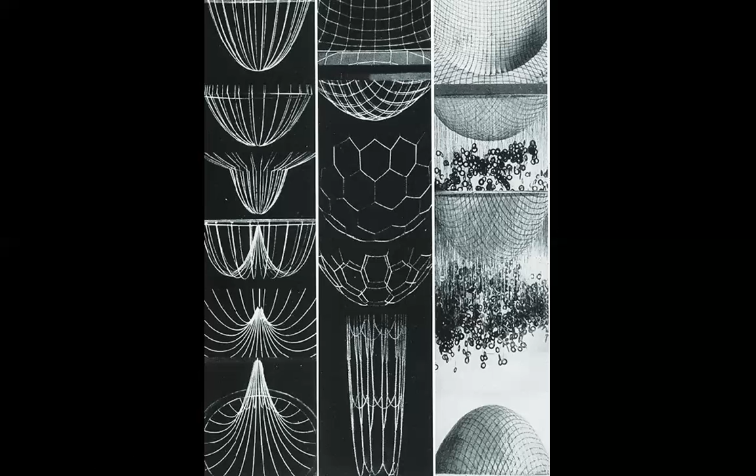Whether it is circular or rectangular, this is not really the point. In essence, from what I know about his work, he tried to infuse movement, a dynamic quality, and even an unpredictability into a structure that was still based on calculations and numbers and so on. In essence, kind of like Iannis Xenakis did in a different way, trying to bring disorder or freedom into an ordered system.

And we kind of see here the same thing - the musicality of a web, almost mimicking a spider's web. He was obsessed by lightness, and he did miraculous things.

I mean physically, it's easy for me to talk. Here, he didn't talk, he made them, he built them. And I like this very much, the ability to bring into physicality the ephemeral, the free, the disordered, the unpredictable, and even sometimes the metaphysical.

Procedural Frei Otto. He had a system which was not linear, which was not rigid, and that system allowed him these sort of things, which can be found in nature, but much more rarely in the work of man. And he was a force in this respect.

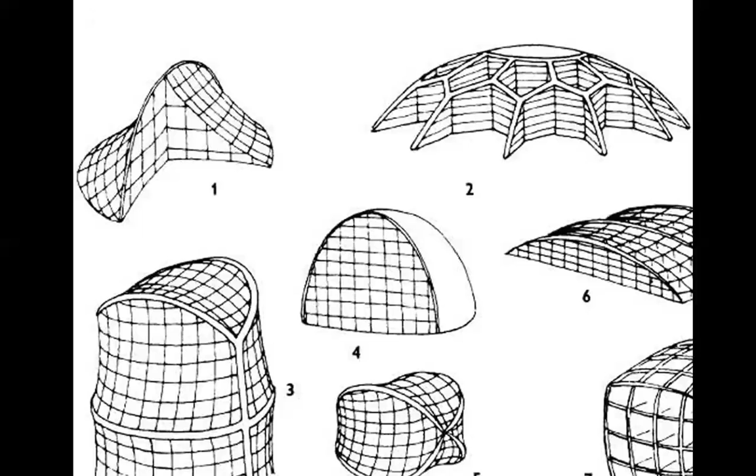16 hours a day, like in Vienna. That's how you learn a language, if it is German or Arabic. That's how you learn the digital language, by studying it very carefully and very intensely and with a lot of perseverance. But unfortunately this is not practiced. In our schools, we postpone and postpone and postpone, and we find glory in using SketchUp in the 6th year. It's not enough. Anyway, I guess we are not too ambitious, and that's a problem.

I said it before and I will say it again. I have the CV of a young Japanese architect from some years ago, maybe 5-7 years ago. And if you look at his CV and at skills, there are around 20-25 softwares that astonished me when I saw them, because at least half of them I never heard of.

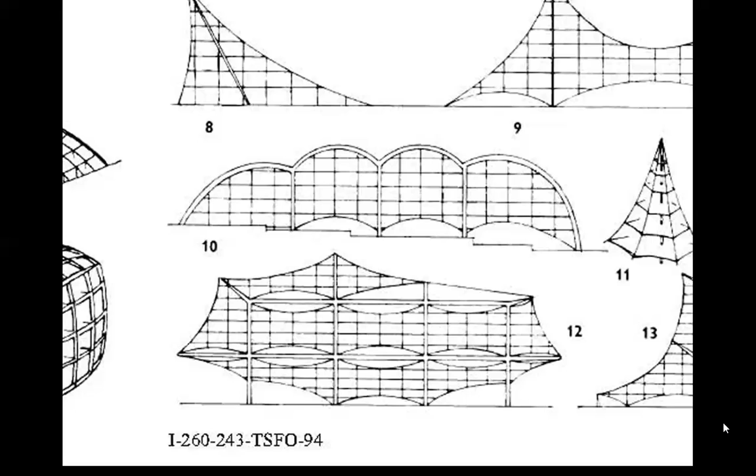It's true, I'm not one of the most knowledgeable about these technologies, but I admire very much the people who push the frontiers, who study the newest softwares, digital technologies, digital procedures. You have to, because it belongs to your time. And it's known, if you are to study a language, any language, the sooner you learn it and the more you practice it, the better. That's how you learn a language.

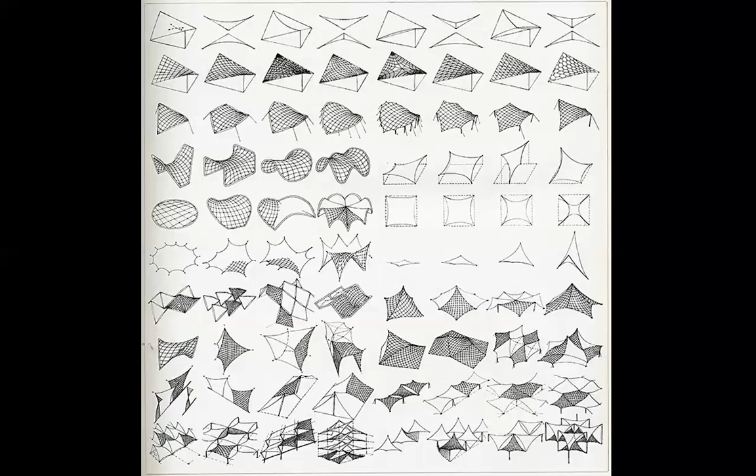Any parent knows it. If a parent wants a child to know, let's say German, well that child will be asked to study German when he or she is 3 or 4 years old or something like this. That's how you learn a language. And with the digital language it's the same thing. The sooner you learn it the better, and the more you practice it the better.

What do we see here? We see again drawings that seem to be, well, they are not undecided. They are schematic configurations, structural configurations that are based on order, but you look here, there are deformations, there are deviations from strict Cartesian rules, and the roundness of the thinking behind them shows the complexity of the procedures that Frei Otto tried to arrive at.

This is problematic. That's why many of our cities are so banal, because as opposed to medieval cities, they simply don't assume the roundness, the spiral, anything organic. They are strict, with parallel lines and 90 degree angles. Here we don't see too many 90 degree angles, do we?

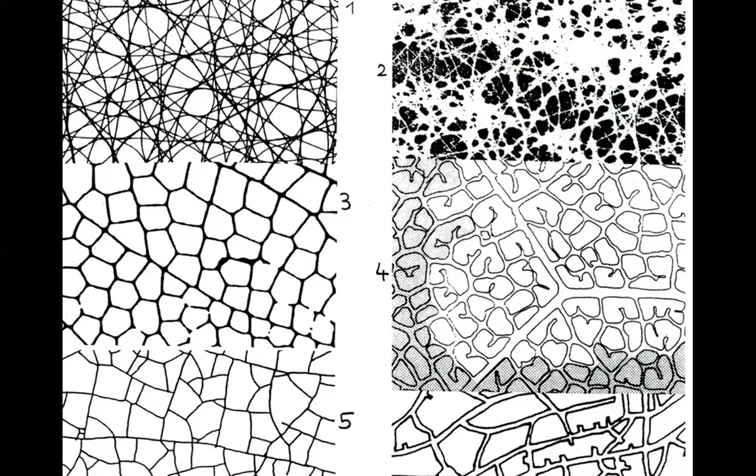Unfortunately, very rarely do I see bioarchitecture in the works of certain schools of architecture. Let me put it in a more diplomatic way.

Interestingly, the naive world of the Middle Ages were closer to some of the newest research, based on very sophisticated technology, which explores spontaneous order. In science, these two words mean something specific. How do you create spontaneous order? As opposed to the rigid Cartesian order, you bring in a so-called spontaneous order.

Look here, no polygon repeats itself twice. They are all a little bit different. They all belong to the same family, but they are also a little bit different, and they accommodate each other.

Is this an organic quality? Obviously this man, this architect, this engineer, was questing for what is life and alive. He was not happy with the dogmatic, rigid crystallization of...

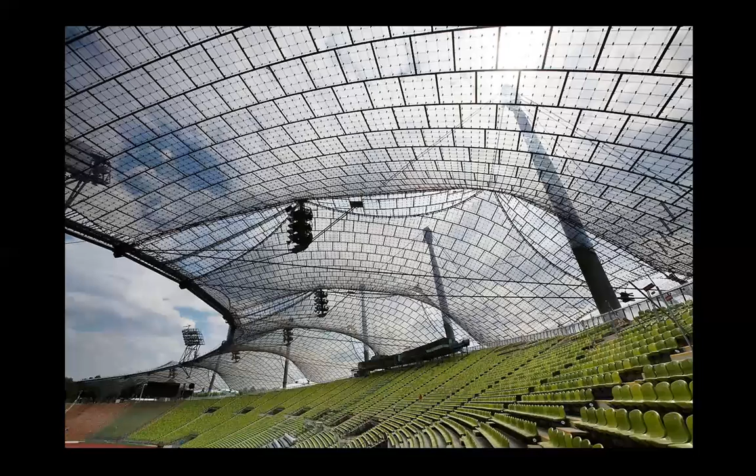Again, it's about building for human life, for the humans, but in a way which would not insult nature. And this is not easy to do. He did it—Frei Otto did it.

A stadium could very well be a prosaic structure, yes, of considerable dimensions, and to bring in the word delicate when you operate within the field of a large stadium—this is not common.

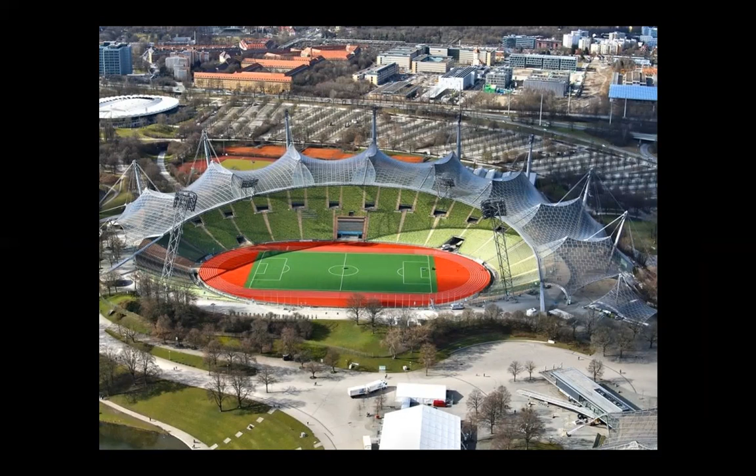But he did it. He built it in such a way that it is functional, but lightweight. It's almost discreet. It's interesting visually, and it works. This is based on his research, his continuous work, pushing the frontiers of both structural engineering and architecture.

Because the truth is, what is an architect? Well, Frank Lloyd Wright put it right: an architect that is a great architect is a great poet. He doesn't necessarily write poetry with words, but he writes poetry with materials—wood, glass, stone, metal, whatever—but expresses a poetical feeling and a poetical thought.

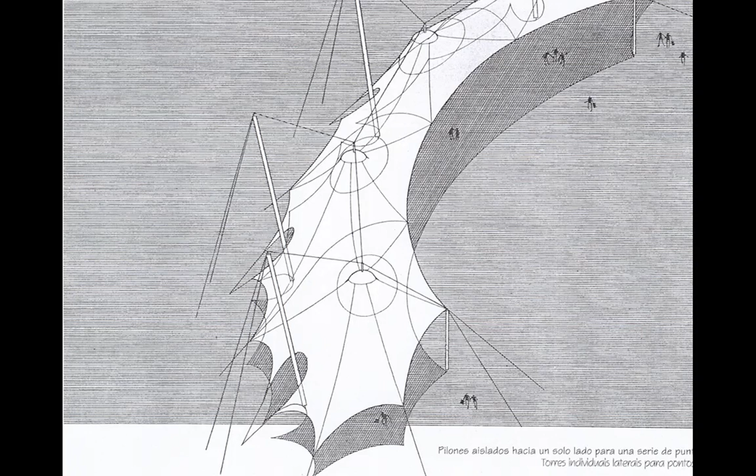I improvise some opinions when I look at these images, just like you do. Someone more rigorous than me and trained in engineering would probably say more valuable things.

I regret Bruce Denzinger is not here. He most surely would have said some important things. I should have invited him, but I didn't think of it until now.

But even if we look at these graphic representations of what we did, what do we see? Well, we see what we see when we contemplate the web of a spider, or anything that animals, insects, or bees do. There is a mysterious order in nature, which science now calls spontaneous order.

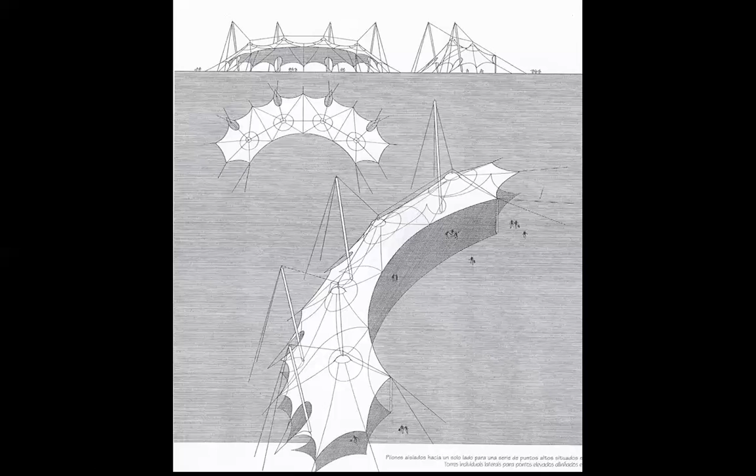And I think Frei Otto was also searching for something similar. If I am to use the words of Pascal, I would say there is l'esprit de géométrie and l'esprit de finesse. Because there is geometry here, but it's not a rigid geometry. There is the spirit of geometry, but there is also the spirit of fineness, which brings in small accidents, or small deformations, small deviations from the strict, repetitive, dogmatic rules.

In essence, it's about asserting freedom without falling into chaos. It's some kind of balance between order and disorder.

And by way of this, I have to tell you, I met a mathematician in the United States. Abraham was his name, Ralph Abraham I think, a mathematician from California, but I met him on the eastern coast of the United States, in Eastern New York, and he invented a word. This word was dyschaos. Now everybody knows there is order and there is disorder, and then we know there is the word chaos. But apparently until him, no one thought of the word dyschaos.

Now what is dyschaos? It's order, but a different kind of order than the first one means. We have order and we have disorder — it's opposite. Then we have chaos, but you'd say the opposite of chaos is order. Now, he says that the opposite of chaos is not order, it's dyschaos.

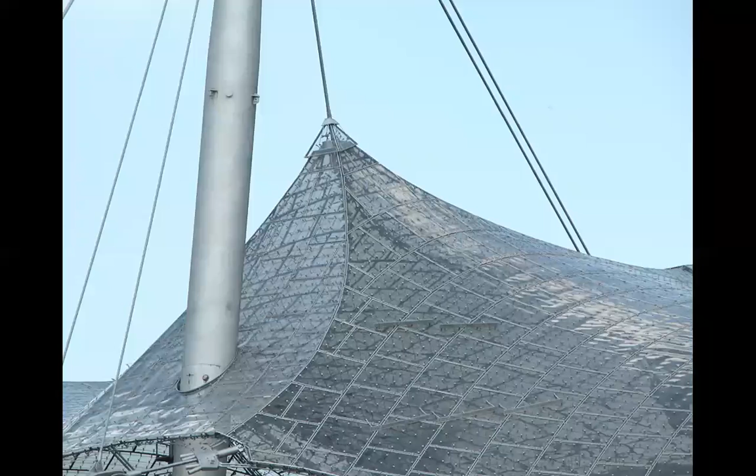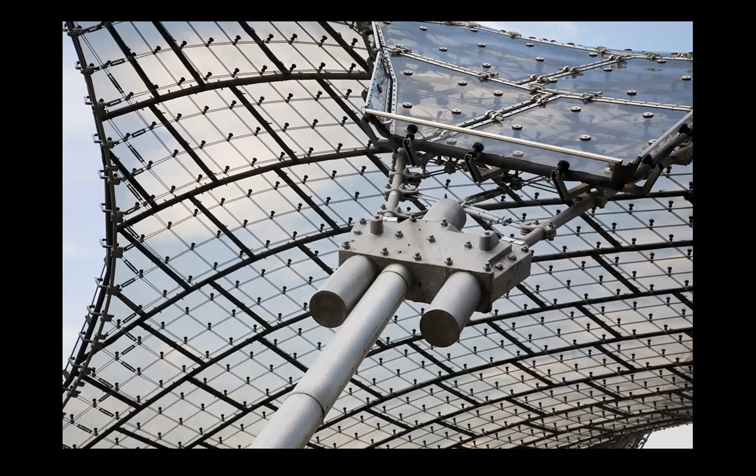It was great. I mean, I throw words here in a more inspired or less inspired way, but this man built with measurable entities, with materials — built and created something that was made by man, was calculated, was measured, but also had the fragility and the gentleness, the delicate aspect of grace. Even these are graceful structures.

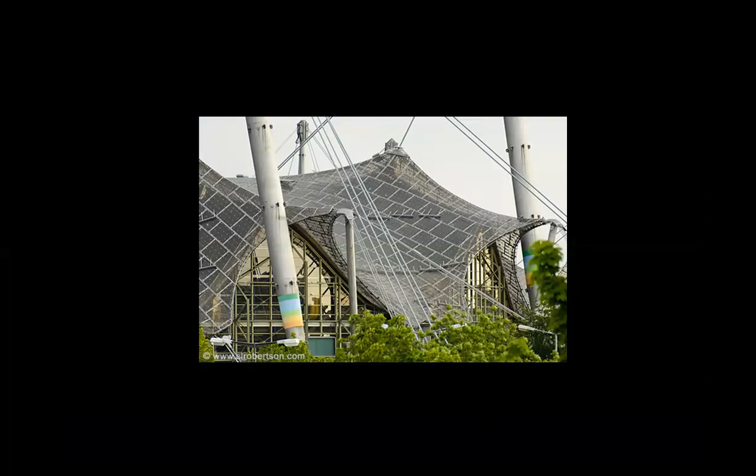That's why I recall these words by Pascal quite often: l'esprit de géométrie and l'esprit de finesse. If you can combine geometry with fineness or with grace, it's like combining will or willfulness with gracefulness. It's not easy.

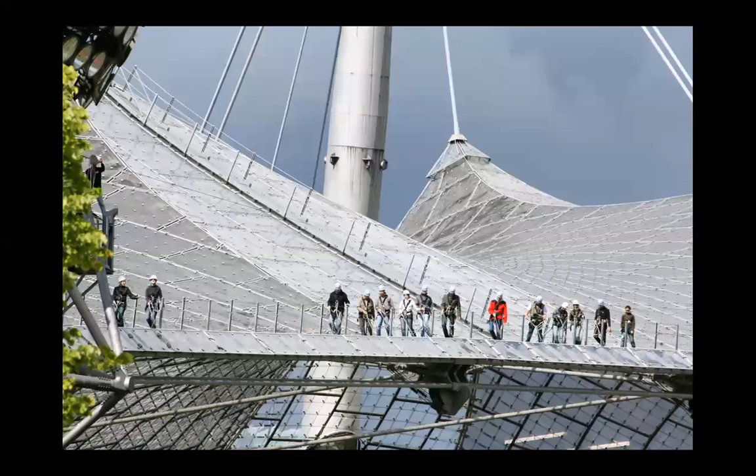Now look how strong these things are, because they seem to be thin and light, and so on, fragile in other words. But these men — probably a very vigorous man — they're all on top of this structure, and probably many others would have been supported by this.

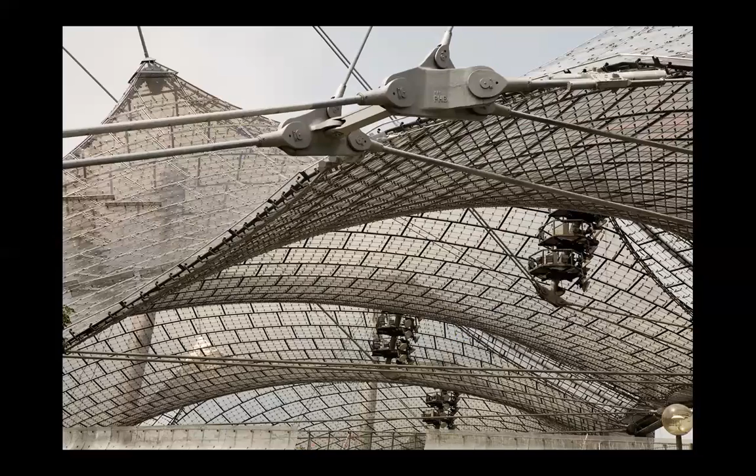To put it simply, any great creator in any field searches for freedom. Maybe I put it simplistically, but that's kind of the truth.

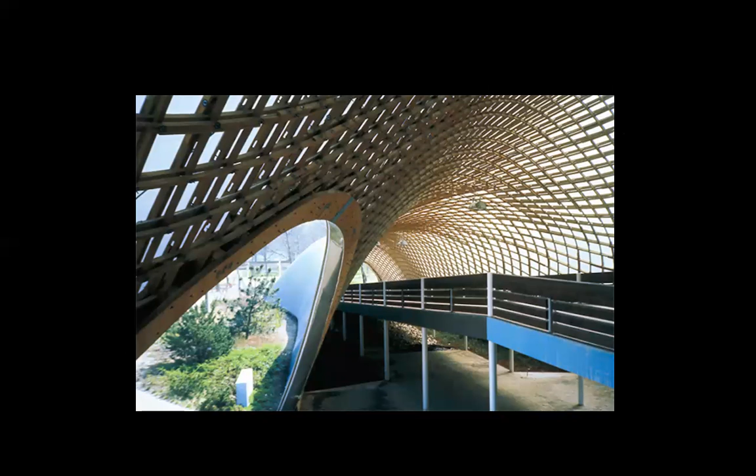This timber lattice self-supporting roof structure allows diffused light into the building and creates a sense of weightlessness inside. Well, what is this sense or feeling of weightlessness? It's actually about freedom, or the illusion even of freedom. But it's important, that illusion.

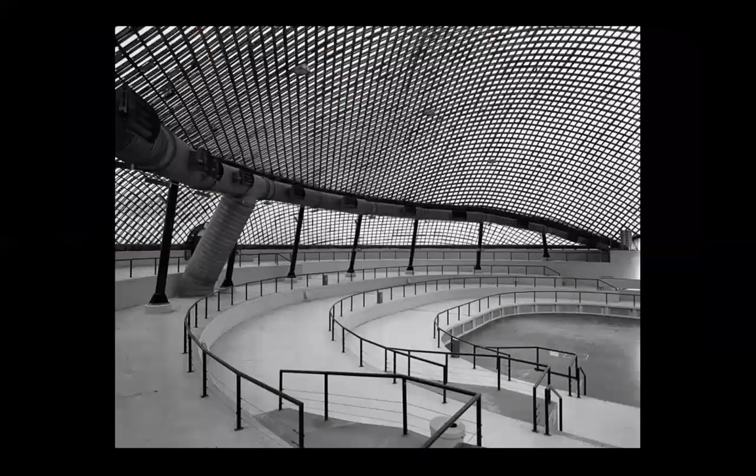And just like in the case of the music by Yannis Xenakis, who worked with numbers and sounds, here he works with numbers, trying to achieve a structure which is not rigid, although it's based on some kind of system — an organic system. That's why I would say his structures are biostructures, his architecture is a bioarchitecture. And look at it — it's coherent, it is a coherent system, but it's not rigid.

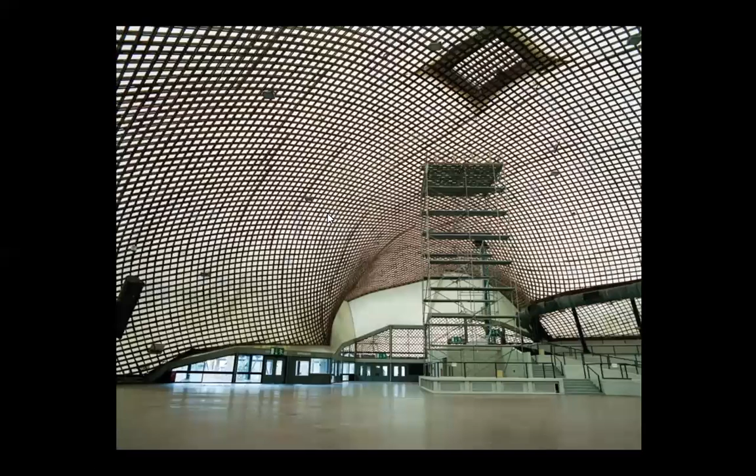He arrived at some kind of mystery of generating a structure as if God made it, when in fact it was man-made. This is what you get when you break the box of simplistic Cartesian thinking, and you see the coordinates allowing for fluidity. That fluidity, look at it, it's beautiful.

Just like in the polytopes of Yannis Xenakis, and in music the same. Music is based on numbers, the notations, the musical score, but you search to evoke through sounds life itself. Here the same thing, the organic world enters the world of man. And look at the span, it's huge, and it's so gracefully done. It's gracefully done because the man was great as an architect and as an engineer. That's why.

What amazes me is that this, what seems to be very freely done, is actually based on calculation, very rigorous calculation. Which means calculation, if it's not an end in itself, could be a means towards achieving freedom.

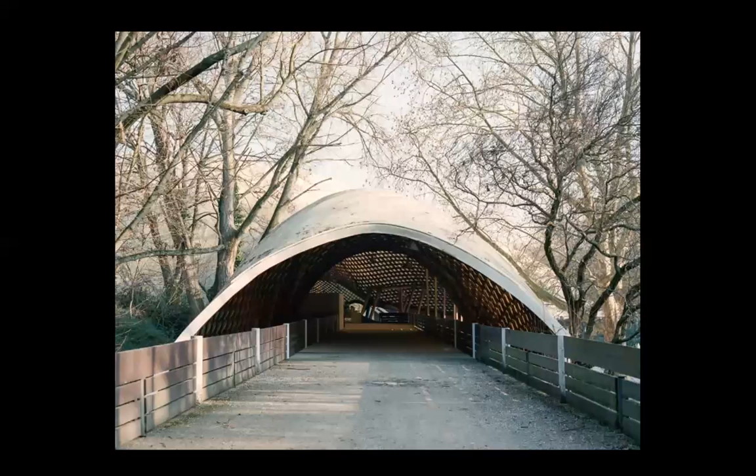I'm sure he was inspired by nature. After all, we saw the title that I read earlier, network, cities, and trees. Trees, yes, the beautiful trees, the beautiful trees we cut down. Look at this, this is almost like a divine Frei Otto work, and like a divine Alexander Calder sculpture. It's beautiful, it's all there. All the mysteries of the world are in the tree and in the flowers and in the grass and in everything that nature made. It's very beautiful, to be honest, more beautiful than even the building by Frei Otto. But it's hard to compete with the author of these magnificent trees. We attempt. It's important, the attempt.

To build in such a way that we do not insult nature. Ideally, we should build so that the trees nearby would smile and murmur, thank you Frei Otto, thank you Francesca Coman, thank you Alexandru. Yeah, we need to work. We need to work, but we also need to love. You can't work without love.

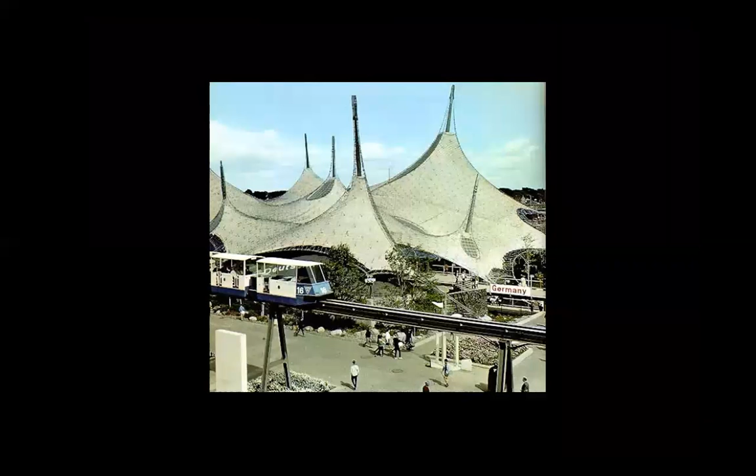So this is in Montreal. I should have had also pictures of Buckminster Fuller's biosphere and the Habitat by Moshe Safdie. Look at this.

This is beautiful. It's like an artwork. It's like an incredibly lyrical graphic work, and it's not — it's a structure, but it's so indeed delicate and nuanced and gentle, and yet strong enough to support this covering above a large space. This is poetry. That's what it is. It's when engineering becomes poetry.

Japan Paper Pavilion, Expo 2000 in Hanover, Germany. Frei Otto designed the Japan Pavilion for Expo 2000 in collaboration with Shigeru Ban, the 2014 laureate of the Pritzker Architecture Prize. So Shigeru Ban got it in 2014 and Frei Otto one year later. Constructed entirely from paper, the grid shell pavilion is made up of recyclable paper tubes without joints. The airy tunnel arch measures 73 meters long and 25 meters wide. Honeycomb boards were used as partitions in the interior.

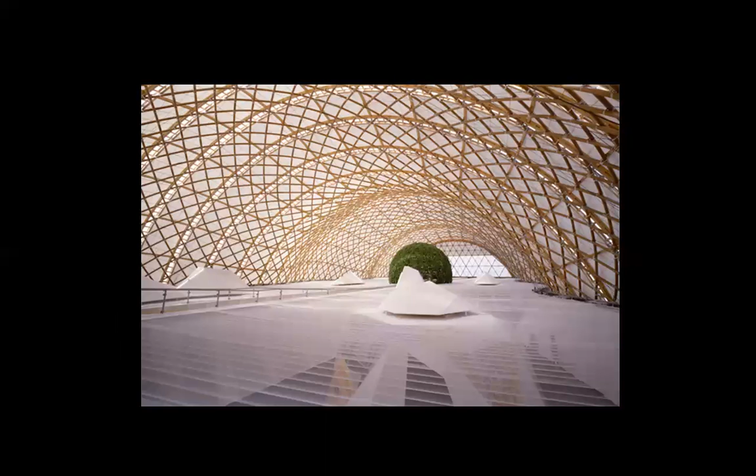Here it is. Well, we recognize a little bit Shigeru Ban here. Well, at that time, Frei Otto was older and very close to saying goodbye to us. I see here actually more Shigeru Ban than Frei Otto, but they collaborated for this work.

There is, of course, a certain elegance, and we know the trick — I almost used the trick, I used the word not very gently, and I apologize. But this is a trademark, is the signature material for Shigeru Ban: paper tubes. He does indeed become an acrobat in using this material.

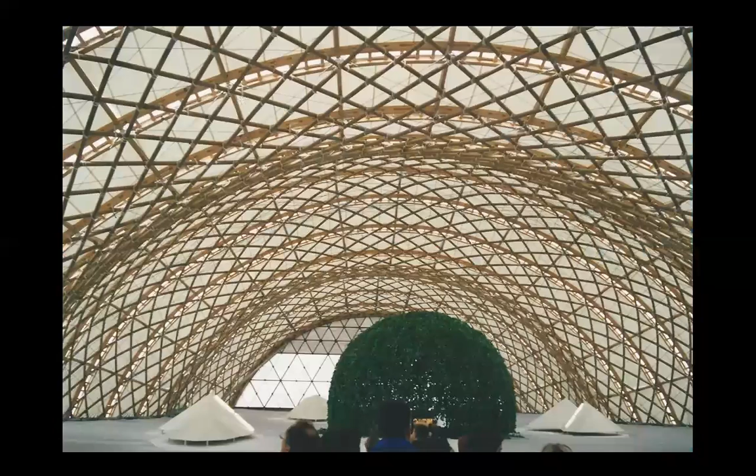I still think in this structure, just like in the previous one that we saw, the interior is more impressive than the exterior. The exterior is opaque. The interior is not, because light goes through.

I don't know, I mean if I was the architect, I would have struggled to bring something of the spirit of the interior towards the outside. Although here, the spirit of the interior is also not so nuanced and complex and lyrical as we saw a few slides before. But that's because that's how Shigeru Ban works.

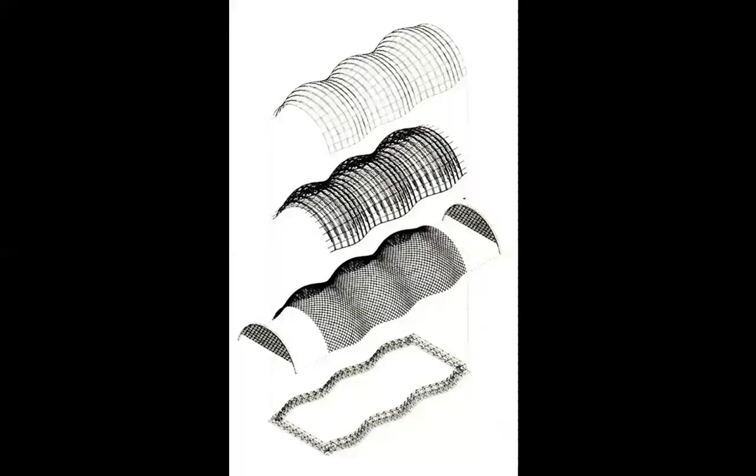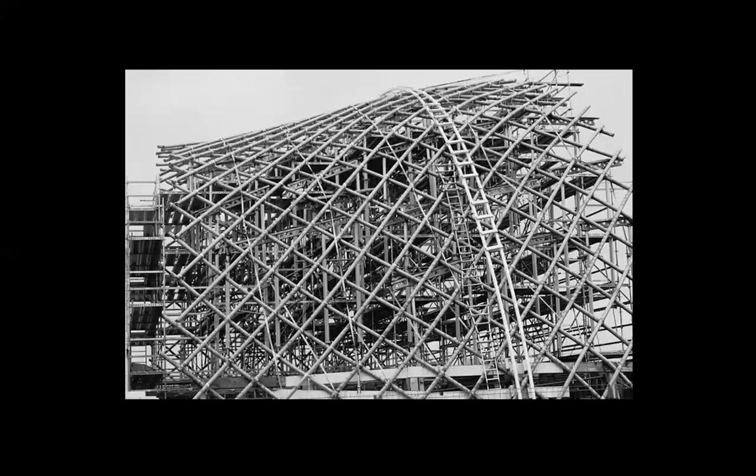Shigeru Ban, I think his most important work is the one done for humanitarian causes. In that field, he is a great master, and he did some beautiful things, even aesthetically. Here, this is an elongating, so to speak, a techno uterus, if I am to call it so. It's okay, but I like more the work that Frei Otto did by himself, without Shigeru Ban.

Here, maybe the tour de force is the usage of paper tubes or whatever — I guess paper tubes. I mean, it is of course miraculous in a way, but only when you consider the material he used.

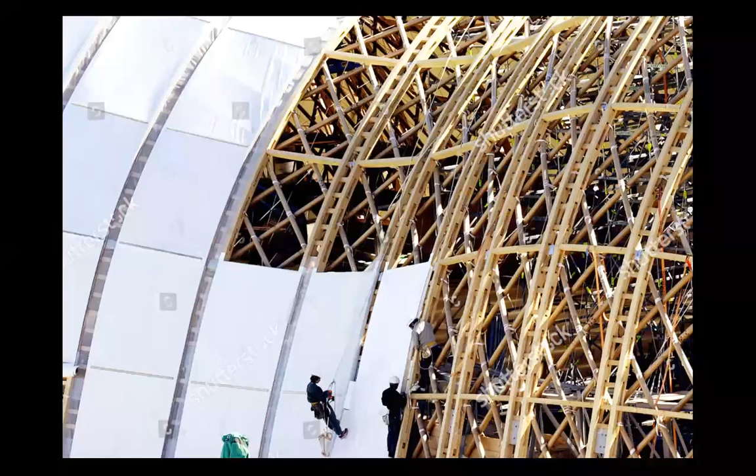And I like this picture very much, and you see the scale is huge, those human beings there. Truly, these human beings, imperfect as they are, and ferocious as they are sometimes — if we consider the assault on Ukraine — can also do beautiful things and miraculous things.

And this is another example, that the ones who know they do not know, that is the human beings, as opposed to those who know they know, the gods, and those who do not know they do not know, the animals. These fragile human beings in the valley, in the crepuscular valley, meaning they who know they do not know, sometimes do beautiful things. And this picture inspires me to remember this thought of Paul Klee, because I quoted from him.

I love very much this thought of Paul Klee, who said there are two mountains: the mountain of the animals, who do not know they do not know, and the mountain of the gods, who know they know. Between these two mountains is the crepuscular valley of man, who know they do not know. But they who know, who do not know, create art, create mathematics, create sometimes beautiful things. Unfortunately, they also create wars of so-called denazification.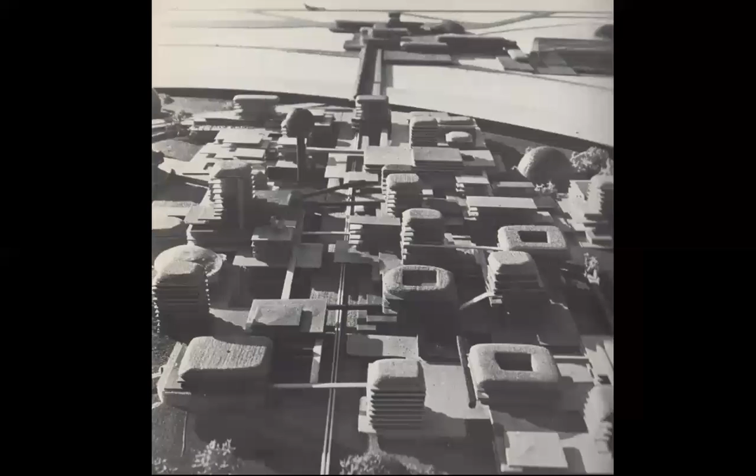If he didn't have this thing on top, it would have been still a hopeful sign that we can live on Earth. But this protection, so to speak - I question it.

Because yes, the idea was that you wouldn't actually see it, but it's like you have an enclosure, an invisible enclosure, but it's still an enclosure. You are still trapped within, even if you don't see it.

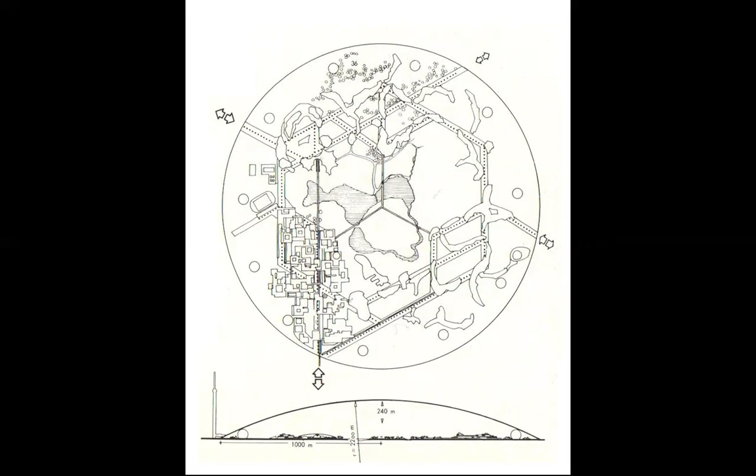But I also dislike this, creating a so-called Eden, heaven on earth in a climate which was not meant to have this green there. I'm very sorry. This is not a respect for nature. This is an arrogant display of human ability to fool himself that he is godlike. He is not.

And that is shown very clearly at Bucha in Ukraine. There is still a beast in the human being, displayed every day in Ukraine, and not only in Ukraine - it was also displayed in Iraq, wasn't it?

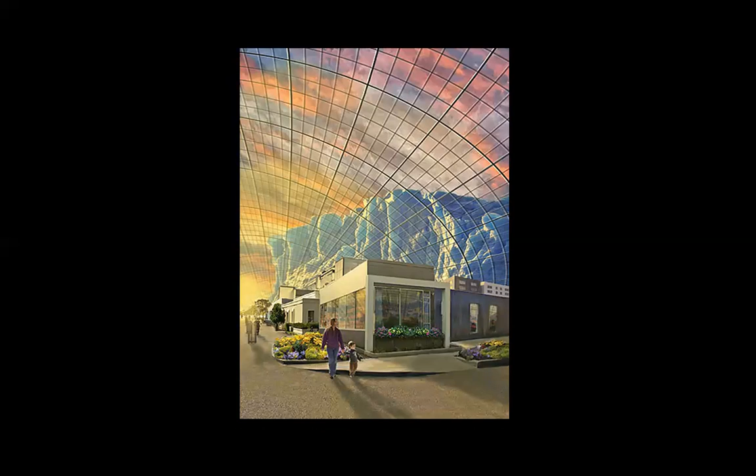So if I look at this picture, whoever made this rendering probably tried to convey the splendor of human life, while outside is the tumultuous, disturbed and potentially disturbing nature, but the human being is in control. Here is an air-conditioned environment where the flowers grow beautifully, and the baby is smiling, if not laughing, and the mother is also happy, and everybody is happy.

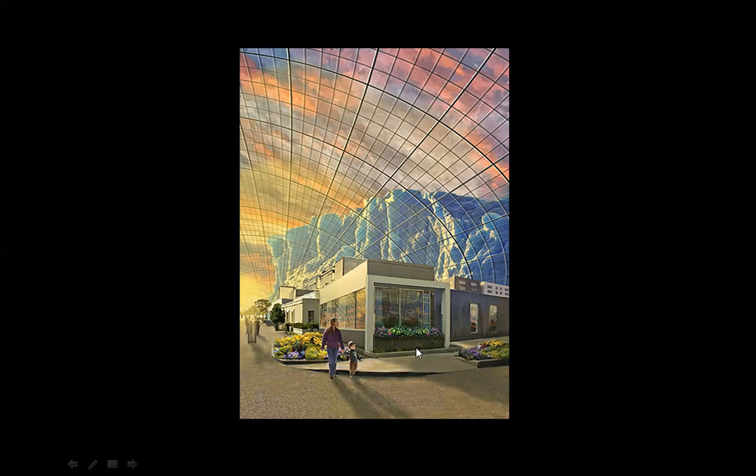But look, above it is the umbrella separating us from the world. That's what it is. I don't like this project by Frei Otto. I'm very sorry. Tomorrow it will be your birthday - I wish you happy birthday.

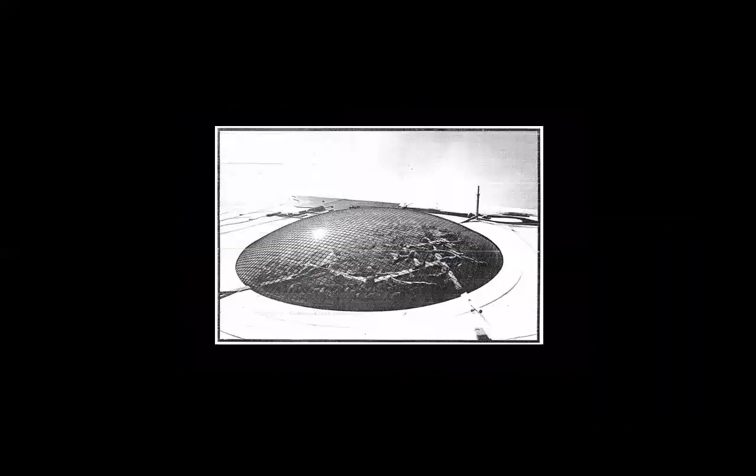I also don't like the work of an architect I admire, and that is Jean Nouvel, for what he did for the Louvre. Yes, from the inside you see the light being filtered poetically, surprisingly, unpredictably, but from the outside you see what it is about - just like here. It's exactly the same kind of attitude.

The human being, godlike, from the conceptual sky of the artist, places this huge thing, this dome as it is called, above, traps essentially a whole human settlement of 40,000 people, and gives them the illusion of having heightened comfort. But I think the true poet would suffocate there, and would break the skin and run away.

Even if he would run away towards a polar bear and risk being killed. This is not freedom. Sorry, Frei Otto.